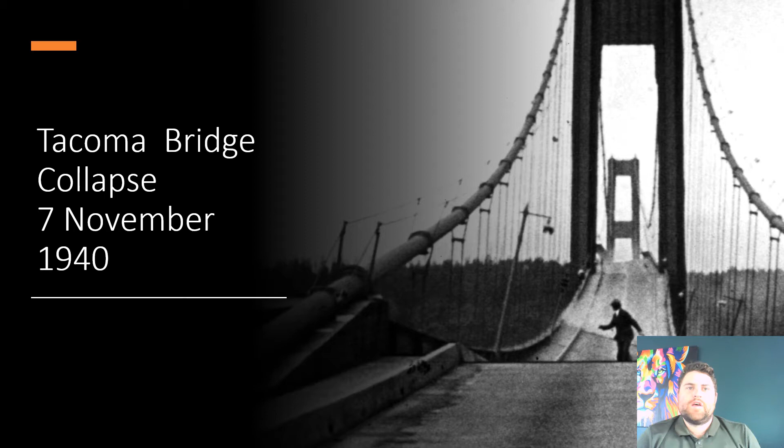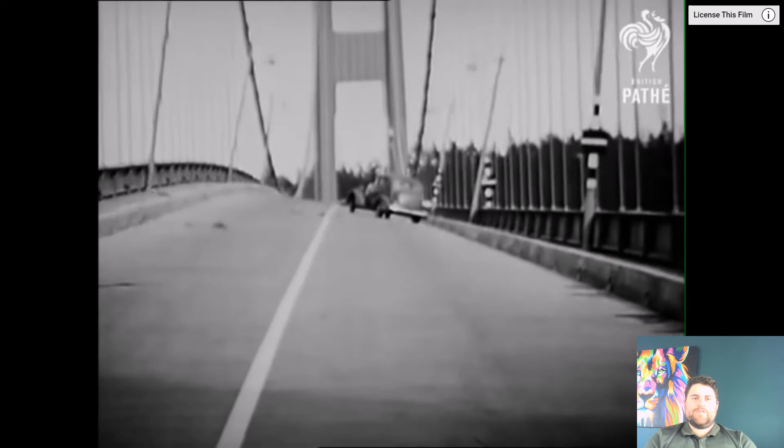Along with the funding, federal authorities required the Toll Bridge Authority to hire Moisseiff as a consultant and include the proposed changes. The state's experts called Moisseiff's plan fundamentally unsound. The design made the Narrows Bridge lighter and narrower than any other bridge ever built. They said it was in the interest of economy and cheapness that these changes were made.

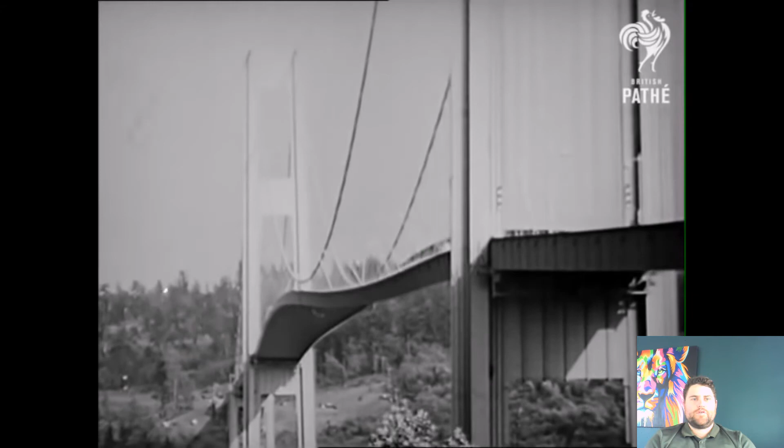Construction began in 1938, and even before completion it was given the nickname Galloping Gertie early on due to the wave-like motion of the bridge. However, on the morning of November 7, 1940, something changed. The bridge deck began to twist rather than bounce, and this steadily increased throughout the morning before ultimate failure occurred.

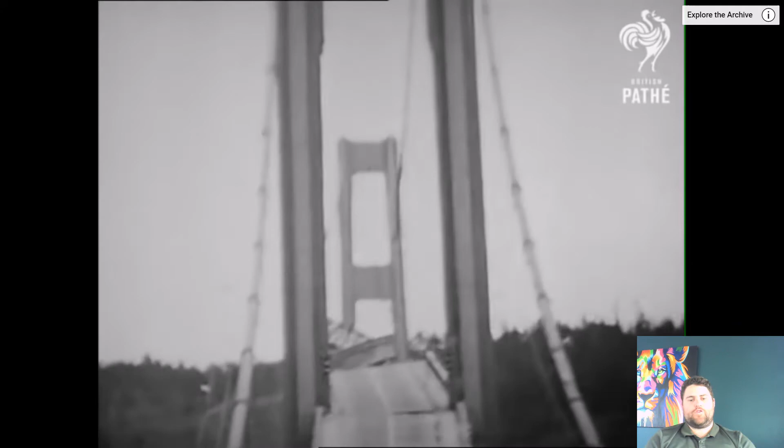The Federal Works Agency, or FWA, appointed a three-member panel of top-ranking engineers, Othmar Ammann, Dr. Theodore von Karman, and Glenn Woodruff, to conduct a formal inquiry into the collapse of the Tacoma Narrows Bridge. Their findings were that the failure resulted from excessive oscillations caused by the wind's action, and that these oscillations were made possible by the extraordinary degree of flexibility of the bridge.

The vertical oscillations were probably caused by the turbulent nature of the wind, and their amplitudes may have been influenced by the aerodynamic characteristics of the structure. Their findings concluded that it is reasonably certain that the first failure was the slipping of a cable band on the north side to which the center ties were connected. This slipping probably initiated the torsional oscillations that we saw in the video. The torsional oscillations is that twisting motion.

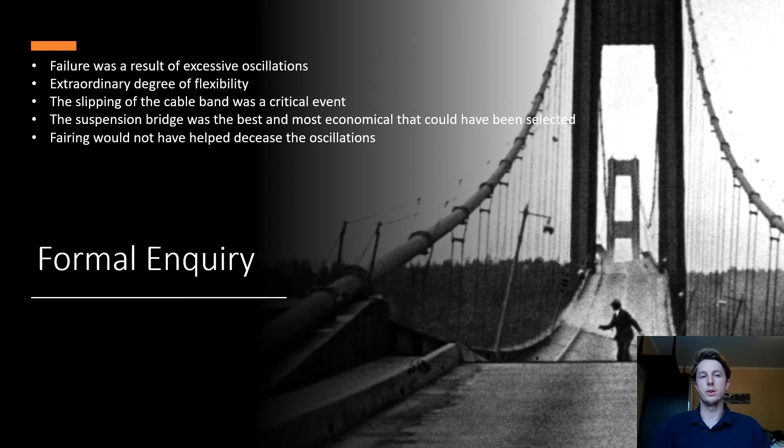It was reported that the suspension type bridge was the best and most economical type of bridge that could have been selected for the Tacoma Narrows at the time, and that the quality of materials and workmanship were of high order and not the primary cause of failure. The exact cause of collapse is still debated today by many engineers, which really just goes to show how phenomenal this disaster was. It really opened the eyes of the engineering community to the impacts of wind and aerodynamics on suspension bridges.

The fundamental weakness of the Tacoma Narrows Bridge was its extreme flexibility. It had very little resistance to vertical and torsional movement because it had such a large depth to width ratio, 1:72. Its long, narrow and shallow stiffening girder made the structure extremely flexible. The first vertical oscillations were noted during the build process. This movement was often witnessed even on mildly windy days. Really, this should have been a big red flag to engineers and constructors of the Tacoma Narrows Bridge that something was wrong.

On the morning of November 7th, 1940, the bridge was experiencing strong winds of up to 74 kilometers an hour. The previously mentioned vertical oscillation of the bridge deck resumed. Shortly after 10 a.m., a critical event occurred. The cable band on the north cable slipped. This allowed the cable to separate into two unequal segments that contributed to the change from vertical to torsional movement of the bridge deck. In this image, we can clearly see the twisting movement of the bridge.

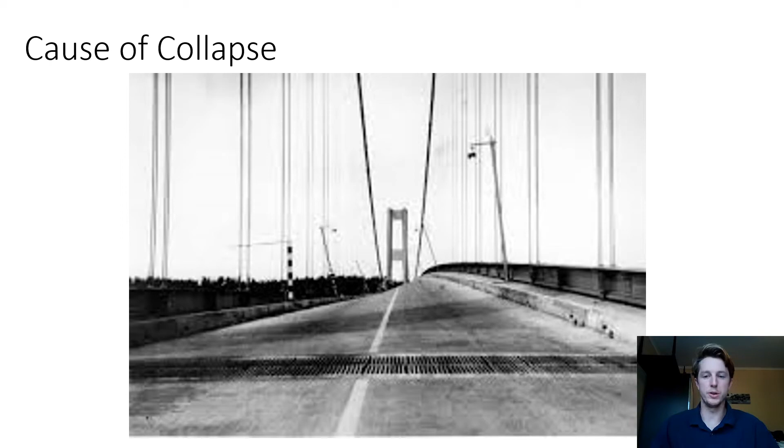More common bridge design now allows wind to flow through the structure of the bridge to avoid this flow separation. So as we can see in this diagram here, more common bridge design uses the drawing on the left-hand side, where you can see that wind could pass through that structure. Whereas the Tacoma bridge had a solid plate girder, so the wind had to separate, had to go either above or below. This created that vortex shedding.

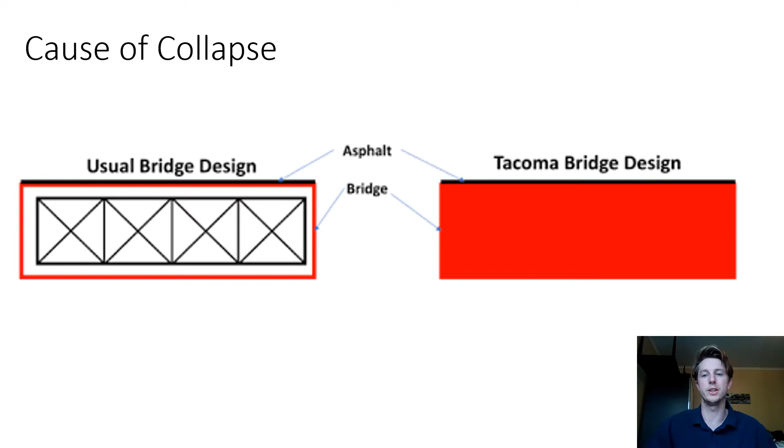And as it did that, its momentum actually took it past and started twisting it in the other direction, at which point the wind could have a bigger impact on it and create more vortexes, so the twisting motion just kept happening. Now, the external force of the wind was not enough to cause the extreme twisting motion that caused the bridge to collapse on its own.

The twisting movement of the deck went into what is known as aeroelastic flutter. The flutter is a harmonic vibration pattern. So the vortex and the deck's twisting motion became synchronized. So the bridge's twisting motion became essentially self-generating. At this point, the bridge cannot naturally lessen the torsional movement.

The torsional motion began small and is just slowly building and building on its own energy, getting bigger and bigger. Once the torsional motion of the bridge became self-generating, progressive failure was unstoppable. Eventually, this torsional oscillation caused too much stress and the bridge collapsed.

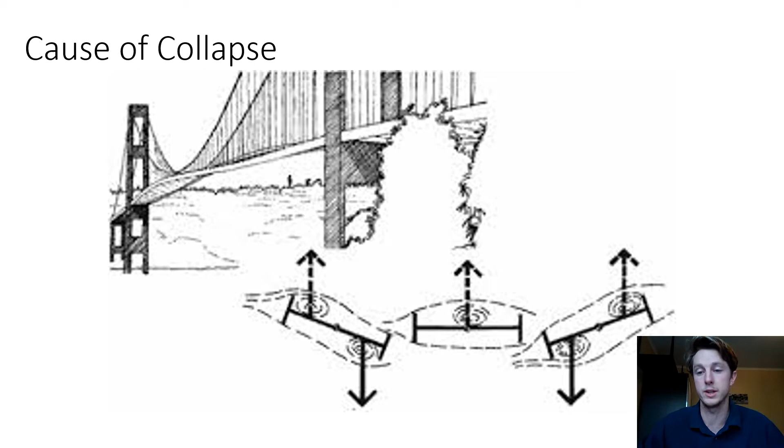The main cause of collapse essentially comes down to the design of the bridge. The effect of wind on suspension bridges at this time in our history was relatively unknown. And in this era, design was based around gravity and how a bridge could be designed to hold the weight of the structure and those traveling on it. Secondary to that was how to do it economically, at the least cost to the taxpayer.

Leon Moisseff's design met all the recommendations and was therefore chosen over Clark Eldridge's original design. The wind effect on the suspension bridge of this length was considered, but vastly underestimated, purely because we didn't know enough. I'll now pass you back to Jamie, who will discuss suggestions and recommendations.

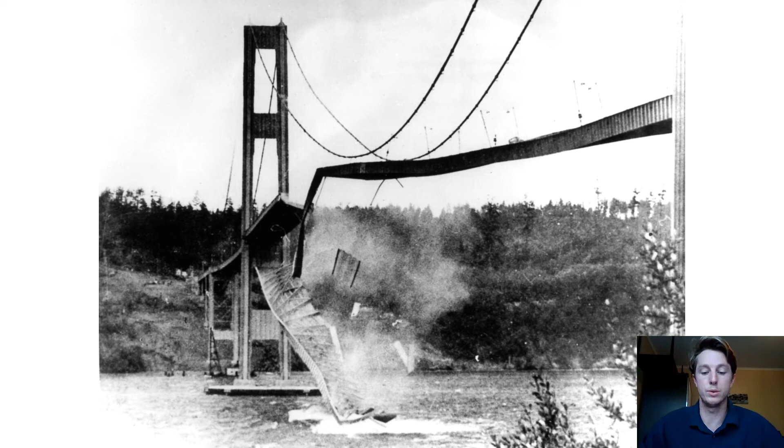Thanks, Tom. Now, as I mentioned earlier, bridge engineers noticed during the construction phase that the bounce or wave-like motion was a cause of concern. To combat this, they installed hydraulic jacks between the tower and the deck to act as shock absorbers. But the devices made no noticeable improvement. It's understood that they were actually damaged during the sandblasting phase of the bridge.

His final report was only submitted 5 days before the collapse, and unfortunately, they did not get to install his other mentioned options of repair. One was a curved outrigger on the side of the girder to deflect the wind flow and reduce that low pressure vortice. The other option was to cut holes in the side of the girder to reduce that pressure differential and the low pressure vortice.

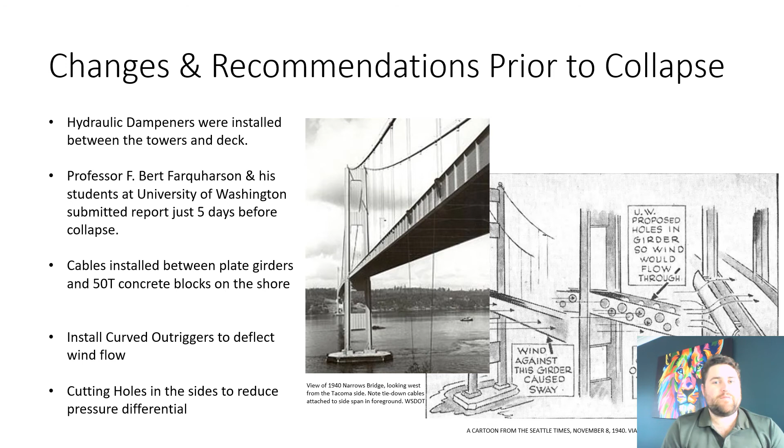Just days before it, the Toll Bridge Authority approved the curved outriggers to be installed, and they had been planned to be put in within 1 month of the confirmed date. Unfortunately, a couple of days later, the bridge collapsed. The formal inquiry, as discussed by Tom, provided some recommendations and solutions to what went wrong and how it could be resolved. Unfortunately, the bridge was not repairable.

However, some of the parts, including the cable anchorage, tower pedestal, and most of the remaining substructure, were able to be reused. The tower that supported the main deck and cables was not able to be reused. It was also noted that had there been a model done and wind tunnel testing conducted, these issues may have been picked up. As such, from that point onwards, everyone was encouraged to ensure that aerodynamics and wind tunnel testing was included in any future design of any bridge.

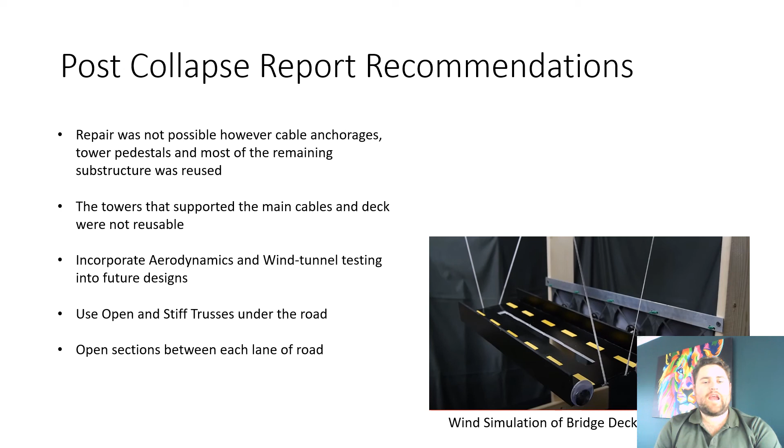Engineers also noted that if an open and stiff truss similar to Clark's design was used, it was unlikely that the bridge would have failed. It would have allowed the wind to flow under the bridge rather than smashing into the girder and deflecting, creating that low pressure vortice. It was also advised that open sections, as per the picture, would have also helped reduce the movement. It would have helped the pressure differential and allowed the wind to flow freely between each section of the bridge.

The Tacoma bridge failure provided us many lessons that we have been able to input in today's bridges. Firstly, safety was the #1 concern and far more important than design. Second, risk can increase when cost cutting occurs, and this should be looked at closely to ensure that safety has not been compromised. Theoretical knowledge needs to be backed up by either past experience or testing. This includes modelling and simulation, which is all done today via CAD, via physical. There are many different ways of conducting our testing and simulation.

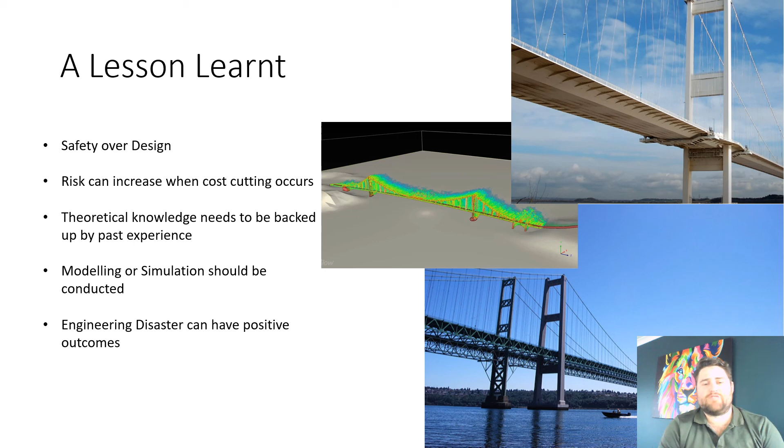The last thing is, engineering disasters can have a positive outcome. Yes, it cost a lot of money. Yes, we did lose a dog. But we are lucky to say that there were no lives lost, and it's really been able to put us in a really good stead for future generations to build safe bridges for all.